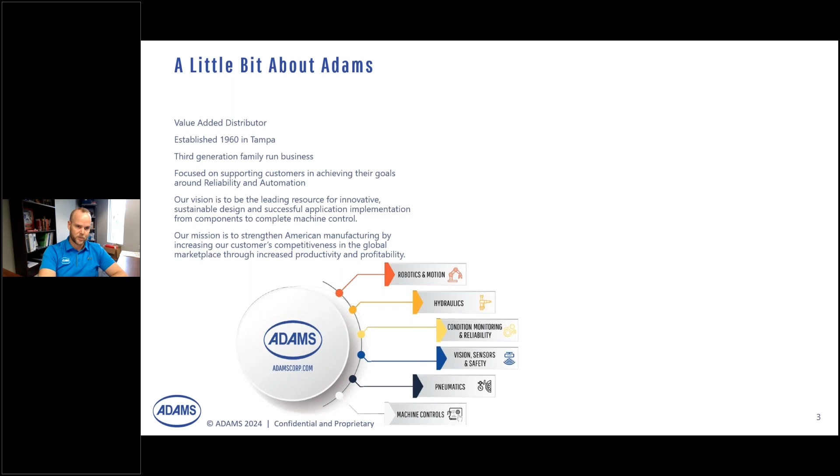A little bit about Adams to start us out. We're a value-added distributor established here in 1960 in Tampa, Florida, on the third generation of the family running this business, focused on supporting customers and achieving their goals around reliability and automation.

A little bit about myself. Background is electrical engineering. I've been in the industry for 13 years, starting with Adams as a technical sales rep based in Jacksonville back in 2011. I've been specifically working with dust collection for the last 9 years. Sometimes I even get my hands dirty, as you see here.

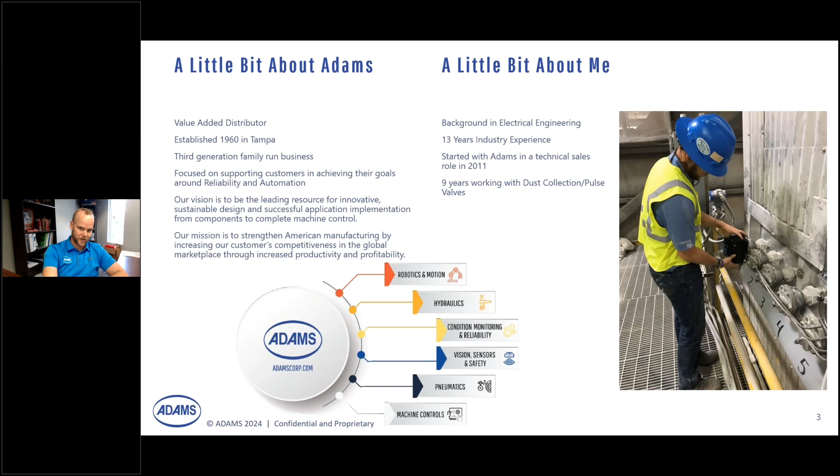So my goal for this webinar is to allow us to discuss dust collection, its operation and typical operation inefficiencies from what we've seen, the energy demand of these systems, and where and why we've found success with these systems.

So the conversation around sustainability is kind of where I wanted to start. Sustainability is a big initiative from a lot of our customers and a lot of industries we see. The main reason I wanted to talk about this is because one of the key pillars of sustainability is its environmental and economic impact. And that impact is driven based on energy demand. So how can we work with customers to reduce that energy and provide them a lot more efficiency around their energy consumption?

As I mentioned, big push from a lot of our customers. So I wanted to highlight some of the customers that we work with, big names that you might know across vast different industries, but each of them focusing on initiatives to reduce energy consumption, to be more energy efficient, and to find ways to use technology that allow them to improve those energy consumptions.

Beyond those industries that you saw, I wanted to highlight a little bit of the other industries that we might deal with. As you can see, it's pretty vast in the industries that we work with. We see dust collectors throughout many manufacturing processes, many manufacturing plants, and there's not many industries that aren't utilizing them to some extent.

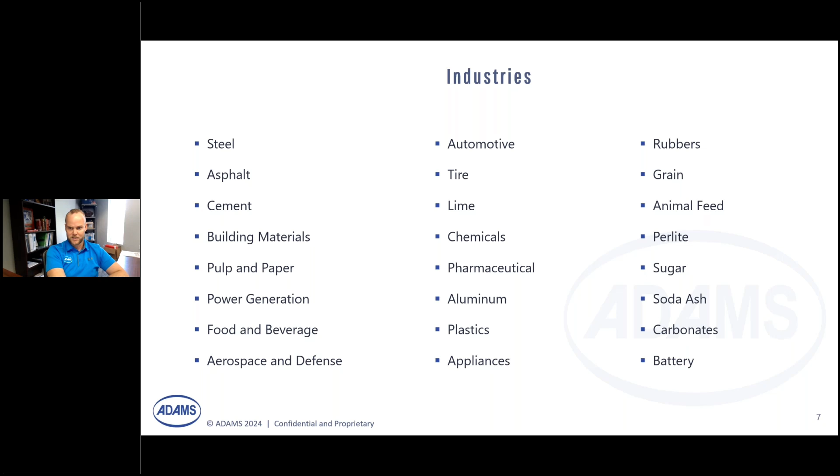So why dust collection? Typically we're seeing these in 3 different categories. This is around controlling emissions as driven by the EPA. This is around indoor air quality, as you might see driven from OSHA's standpoint, or in the manufacturing process of the product that customer might be manufacturing. Think about a cement plant and a raw mill being used in that process of the manufacturing.

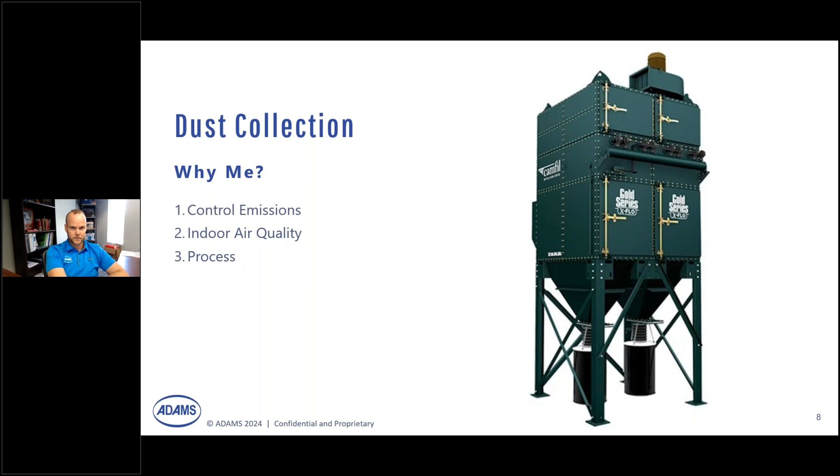There's 4 different types of dust collectors that we typically see in the industry. The main one that we focus on, and the main one that I'll be discussing today, is pulse jet baghouses. So I wanted to start with a little bit of the operations on how these are used.

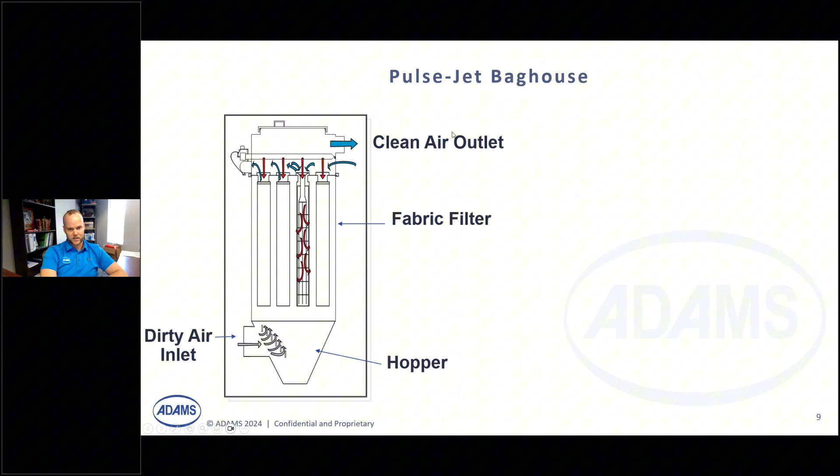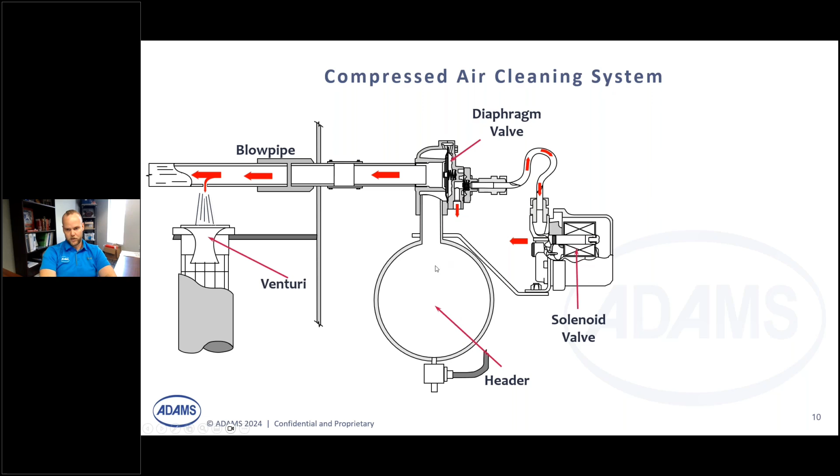So I wanted to dive in a little bit deeper, specifically around the cleaning system of these pulse jet collectors. Typically what you're seeing in these systems is you have a header where the volume of air is being held. That header is leading to a diaphragm valve and leading into a blowpipe. That diaphragm valve is triggered by a remote bleed solenoid valve. Upon the air flowing through the blowpipe, you're going into a venturi that is then cleaning the filter.

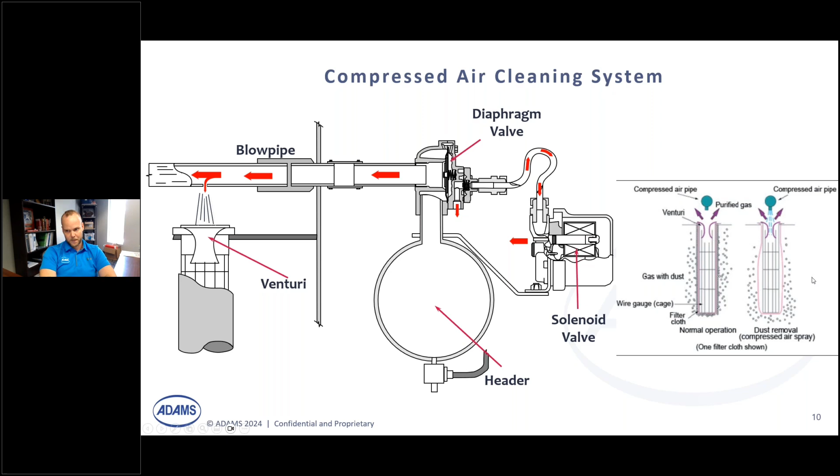The technology used, and that has been used for many years in this operation of these pulse jet collectors, is a diaphragm valve technology. Unfortunately, with that technology, there's inefficiencies that degrade over time and that cause the operation of these systems to not be as effective as they should be.

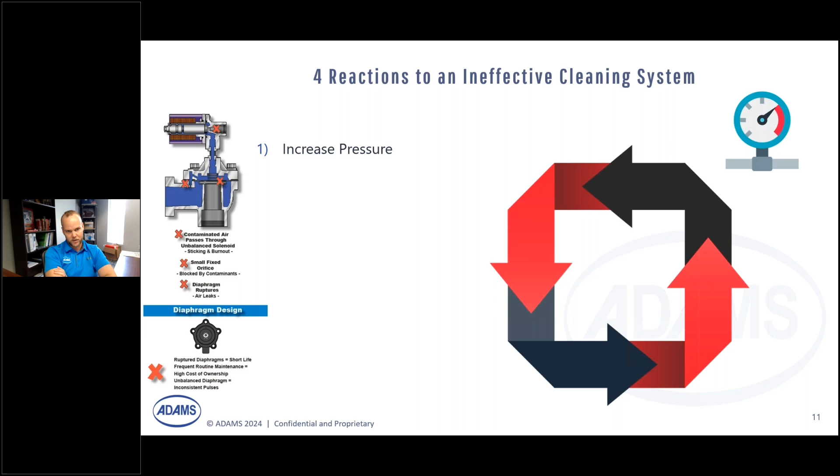When working with customers, we see that typically to overcome these deficiencies, what they do is follow 4 reactions of these systems. They'll typically start by increasing the pressure operating on these systems, feeling that the higher pressure will allow us to be able to clean the filters better. When that doesn't necessarily solve the problems, they'll then follow up by increasing the pulse frequency, that is how often these valves are fired, to get them to pulse the filters more frequently to try to clean the dust off of those filters.

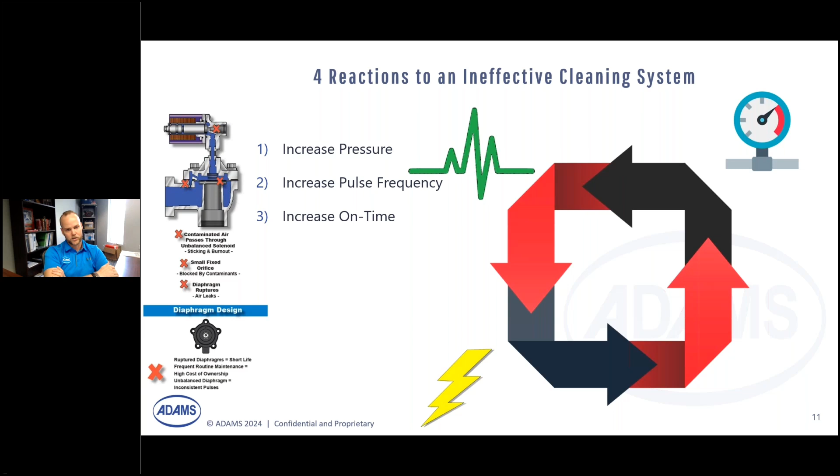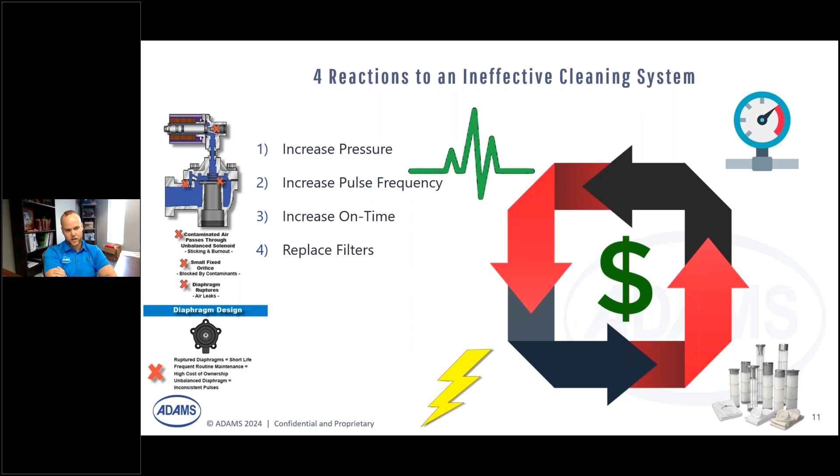Next step they'll do is increase the on time. The on time is how long that solenoid is engaged and how long that valve is held open. Following these processes, if they're still not able to control the differential pressure and get the systems to operate effectively, they'll end up replacing the filters. All of this creates significant operating cost, all revolved around valve technology that's just not being used properly to allow these systems to operate as well as they should.

So how are we different? The valve technology we use is a spool valve technology versus a diaphragm technology. That spool valve is also operated by a 4-way pilot, allowing us to shift the spool back and forth via air. With this, we're able to see multiple advantages in the operation of the systems, but where we're focusing today is around energy savings and filter bag life.

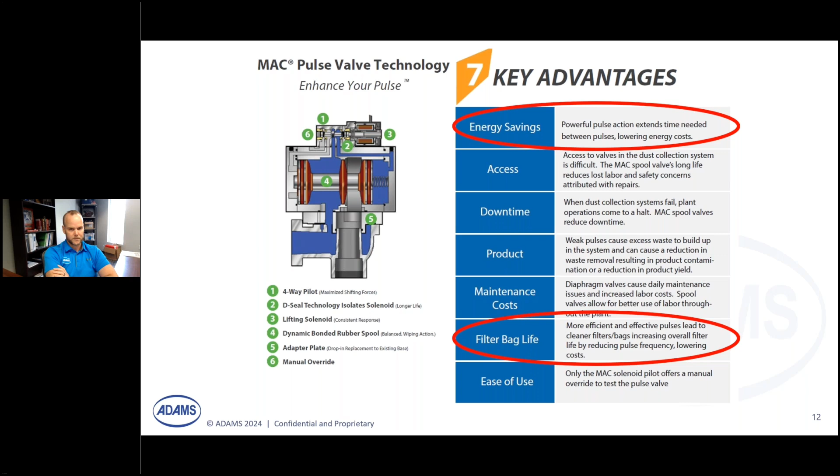How we're able to achieve this is really around pulse efficiency. I wanted to use this scope to give an example of how we're operating these systems much better, simply by changing the valve technology. As you can see, we're engaged electrically for the same amount of time, and operating with the same system pressure, but we're able to achieve a higher impact force because our pressure drop over the valve is significantly less than the existing diaphragm technology. With our spool design utilizing air and a heavy spring to close it, we're able to close that valve in a much sharper time frame, creating a much sharper whip effect and cleaning pulse on those filters. What that looks like in operation, you can see here in this video.

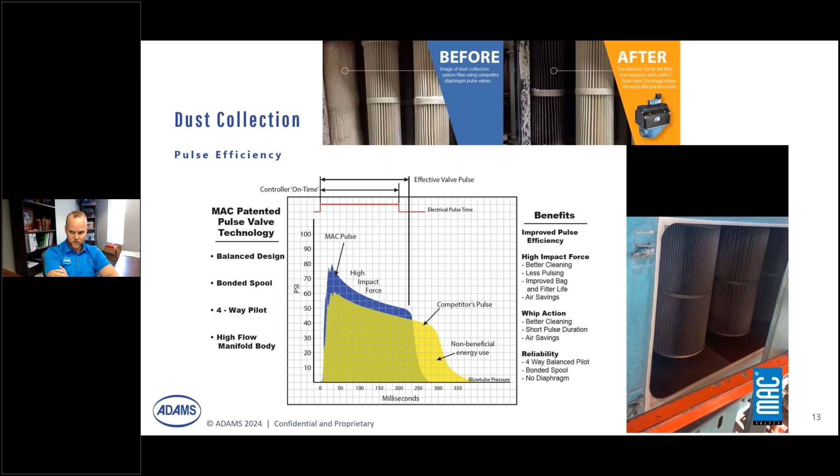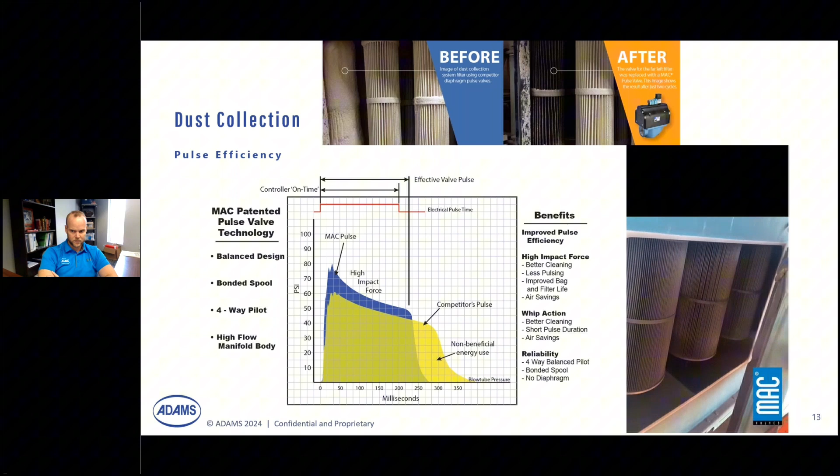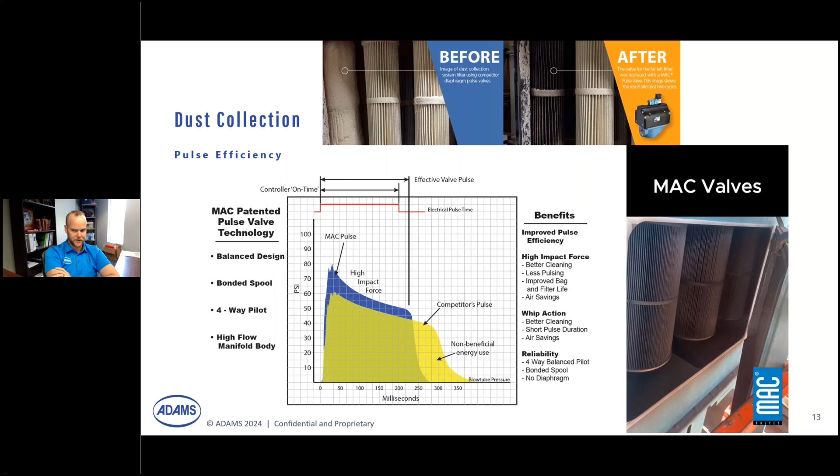I'll play this video one more time. As you can see, there's a standard diaphragm valve operating this row of filters, and the second row is being operated by a MAC pulse valve. You can see significantly more dust is being pulsed off of that filter, dropped down to the bottom of the hopper to be collected, allowing the differential pressure of those filters to be significantly less, so it has to fire off less often.

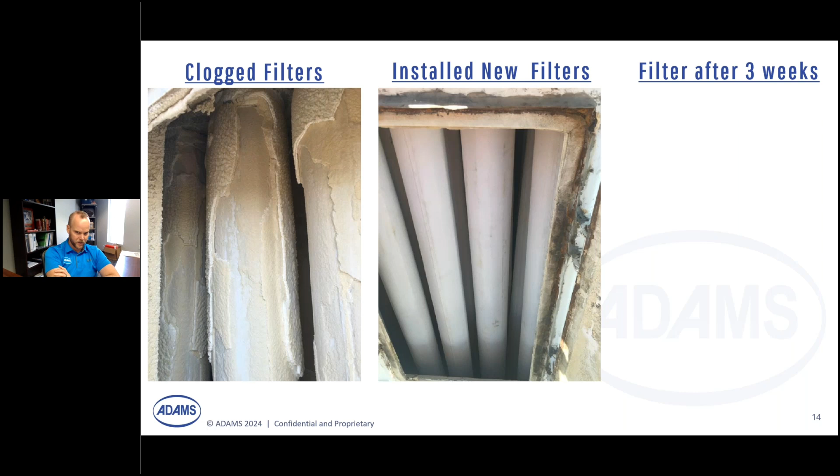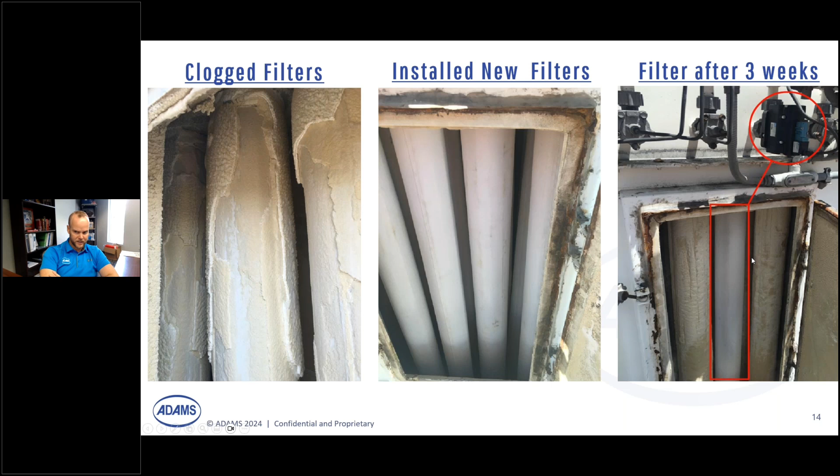Here's another visual representation that I felt was pretty impactful to show. This is a customer's clogged filters on their dust collector. The customer installed new filters and did nothing but put a MAC pulse valve on one of the channels, leaving the diaphragm valves on the separate channels. After 3 weeks, you can see that just the one channel with the MAC pulse valve is significantly cleaner than those channels where it's operating the Goyen valve, or diaphragm valve, still.

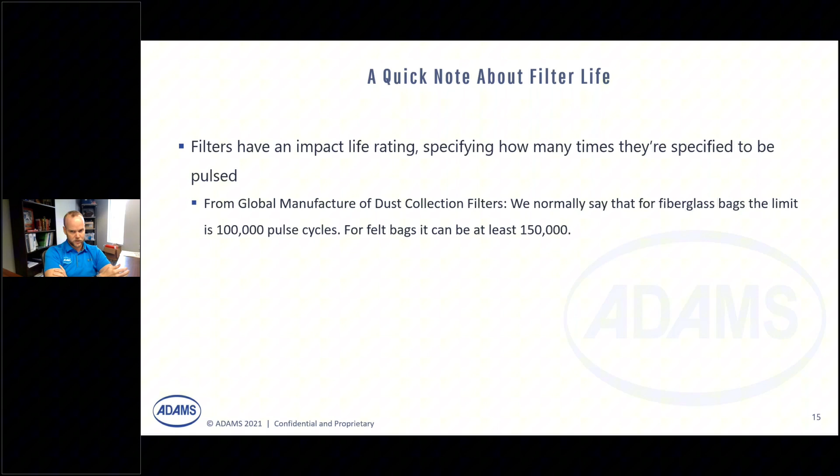One thing to note about filter life: these filters have an impact life rating specifying how often they're able to be pulsed. We're typically seeing this could be anywhere from 100,000 to 150,000 cycles. If we're able to clean the filter per pulse more efficiently, we can theoretically extend the filter life because we don't have to pulse them as frequently, which results in us being able to accomplish some sustainability goals by reducing the number of filters heading to landfills.

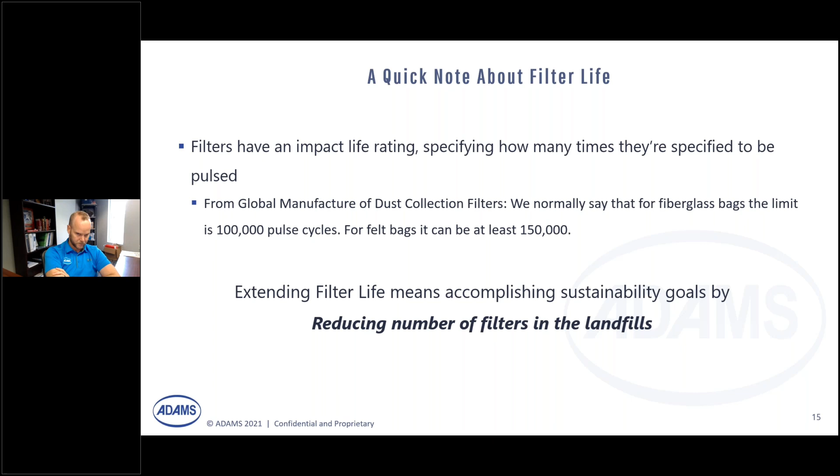So from filter life, I want to talk about energy. I really wanted to talk about filter life savings and the energy impact of these systems. The first place I wanted to start was a significant case study we worked on with one of our customers, who were actually awarded the Best of the Betters for the Better Buildings in the Department of Energy. In this application, they were able to identify compressed air as one of the least efficient utilities in industrial plants, and then see that their dust collectors were the main consumers of this compressed air.

And that's what we see in multiple industries. So what they wanted to do is drive an initiative on how they could reduce the air used in those dust collectors to improve performance, improve efficiency, and reduce the environmental impact. Working with our team and the customer, implementing the MAC pulse valve technology and allowing them to better optimize their system, this plant, as an example, was able to reduce the operating pressure from 100 psi to 85 psi, allowing them to shut down a compressor.

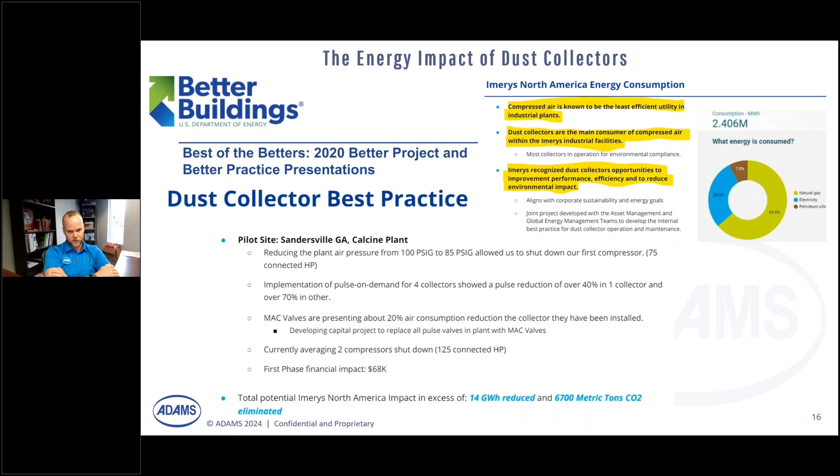Rolling this out across multiple collectors, they were able to reduce air consumption around 20% throughout the facility, shutting down additional compressors and providing a financial impact of $68,000 in savings. This is something that drove them to make an initiative to upgrade their pulse valves throughout all of their plants globally to the MAC spool valve technology.

And I just wanted to highlight another article around this same implementation from Compressed Air Best Practices as well.

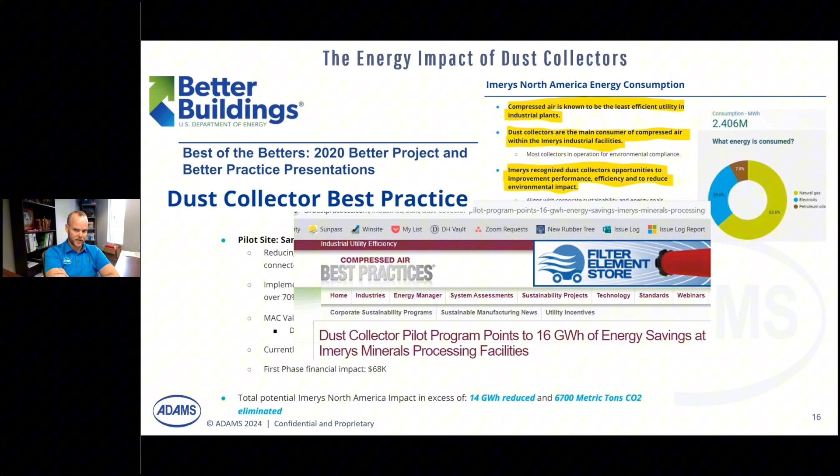Sticking with the philosophy of third-party comparisons, just to be able to show some data. I'm very much a data person, so I want to be able to provide this as much as possible.

Compressor Energy Services, a company out of the Northeast, worked with one of our customers evaluating the flow consumed on a single dust collector that operated with 30 valves. In their evaluation, they found this collector was using an average airflow of 42 CFM, equating to about $7,000 of operating costs just dedicated to the air consumed in that collector.

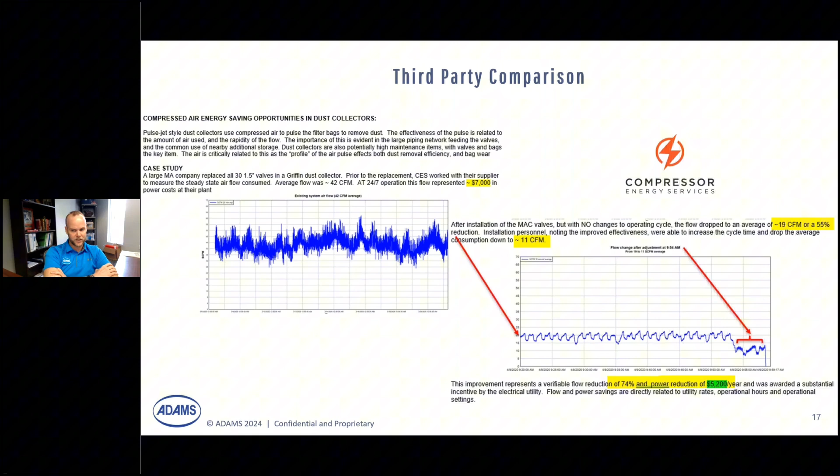Doing nothing but changing the valves on that collector, they reduced the air consumption by about 55%. Following up, changing the operating settings due to the valve upgrade and what it was enabling, we saw them drop air consumption down another 8 CFM to 11 CFM. This allowed the customer to reduce flow in that system around 74%, reducing operating costs from $7,000 down below $1,800 — saving $5,200 out of the operating cost of just the air in that system.

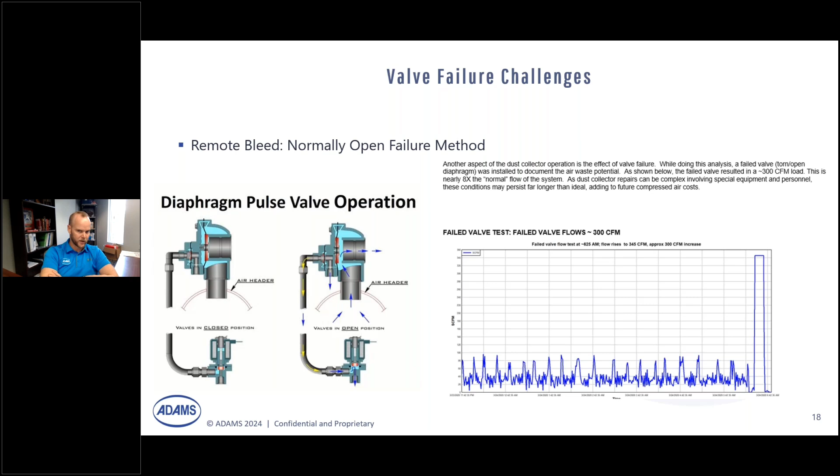Whereas the spool valve technology is designed to fail closed. So if the valve ever were to fail, it fails in a closed state, not driving air through that header or through that valve, allowing the other valves and channels to operate as effectively as they need to.

I wanted to highlight our process. Our process is to visit with customers to survey existing collectors. We work with these customers to identify the valves utilized in these systems, identify the existing settings and operational data — gathering information about how the system currently operates, what the differential pressure settings are, what the on-time and off-time are, how long the filters are lasting, and gathering all of that data.

From there, we take that data back and put together a proposal for our customers, presenting what the upgrade would look like, the anticipated cost savings, and total operating cost of these systems after implementation of the spool valve, MAC valve technology. This allows us to show customers what their ROI would look like based on this investment.

Following the order of these systems, our team works with customers training them on how to properly install these valves, because it's important to put these in properly and utilize the expertise we have learned through this process to make sure these valves are operating as efficiently as possible.

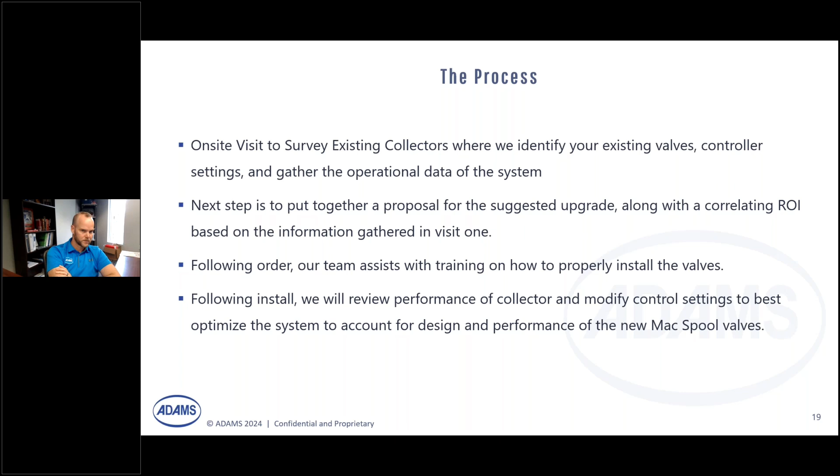Following that process discussion, I wanted to talk through some different examples of where we've been able to implement this with success, to show customers how they can see the impact in their systems.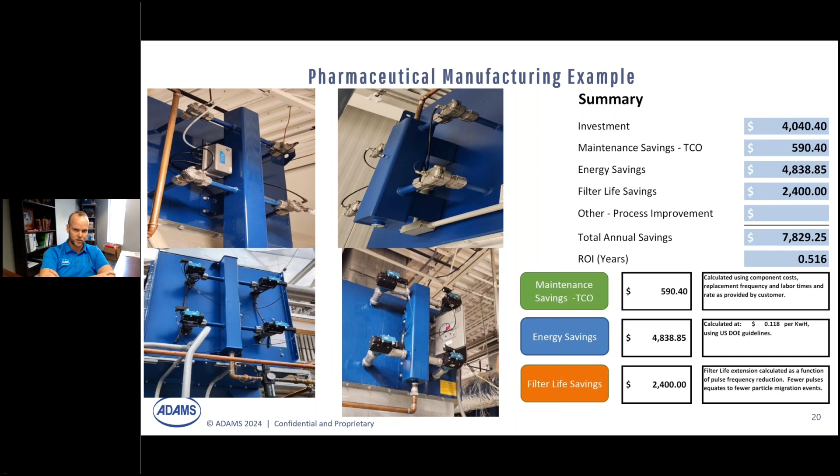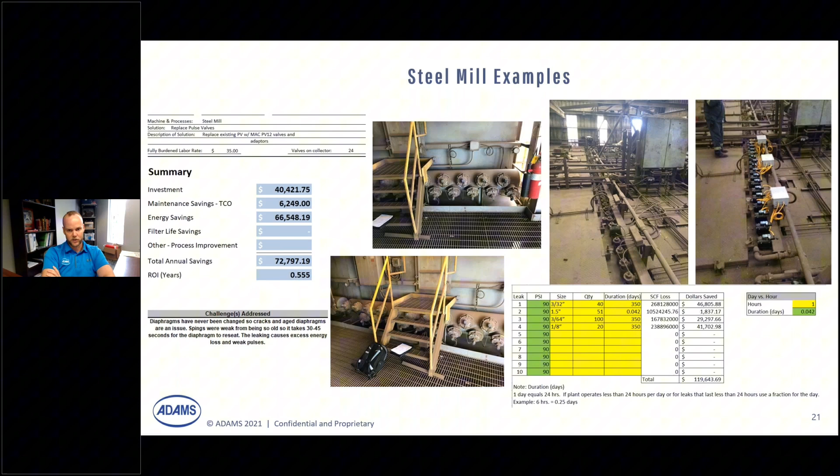That's not cleaning the filter, it's just dragging that out. What we're able to do just by implementing the MAC valves is to allow that closing to be in the milliseconds range as it should be, because you're able to use our valve technology and the air from the four-way pilot to shift this back and forth effectively to provide that sharp pulse, to fire less often, to clean these filters and extend the time in between these filters being pulsed.

Another powerful example here. This was a customer in the gypsum industry that implemented our valves on one dust collector that was mirrored from another collector just right in front of it. This example shows an existing diaphragm valve technology collector versus our valve collector, showing these systems operate exactly the same. The only thing different was the valves being changed. You can see the header pressure, the pipe diameter, the flow coefficient, everything's uniform.

What it comes down to is the consumption, how often is it cycling. You see 700 for the existing diaphragms, 250 for the MAC valves. Same amount of pulse valves throughout, 54 on each collector, and then the consumption in cubic feet per hour. Operational hours are the same, and the consumption per year. So you look at just the operating cost of these two collectors, one being around 27,000, and then after the upgrade for the MAC valves, the other being under 5,000. A significant amount of savings with this being just two of the dust collectors in their full plant.

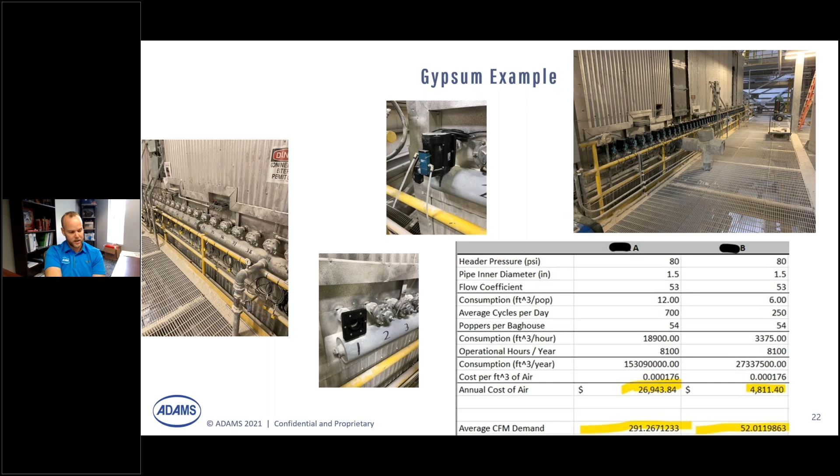Another example in a paper mill where we were able to work with a customer to upgrade these pulse valves on their powerhouse. This was highlighting energy savings, filter life, and operational costs in regards to having to change these valves that you would have to get a lift to be able to get to. So there's multiple levels of this improvement, but realistically looking at the two things regarding sustainability, our energy savings and our filter life extension, just those two equate to over $4,000 in savings for a small collector here that only had 10 valves.

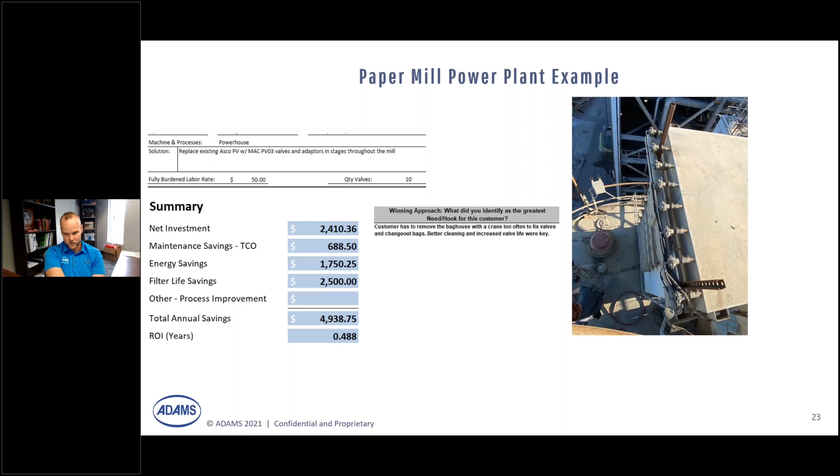Talking through our process, what I wanted to emphasize is us coming back out and working with customers to make sure these systems are operating and the settings are how they should be. There's a customer that had made an upgrade to the MAC pulse valves, and a couple weeks into its operation, we wanted to come through and make sure the system was operating as it should, the settings were optimal. What we found is that the settings hadn't been adjusted from the previous diaphragm valves.

That equated to the valves being operated at 400 milliseconds on time and being pulsed 9 times per minute. Through optimizing that system, through monitoring the differential pressure, and through changing the on time to what it should be, we brought that on time to 140 milliseconds and dropped the pulses per minute to 3. Just those settings on that one 9-valve collector was able to provide the customer $24,000 in annual savings.

So there's multiple examples here, and this is just a few that I wanted to show you. But realistically, the amount of cost you can save from an energy consumption standpoint to achieve those sustainability goals, to reducing energy consumption and to make the energy you're using operate more efficiently, that's really something we're able to achieve with customers on a regular basis. We wanted to make sure this was known throughout, and that's the reason why we wanted to have this webinar.

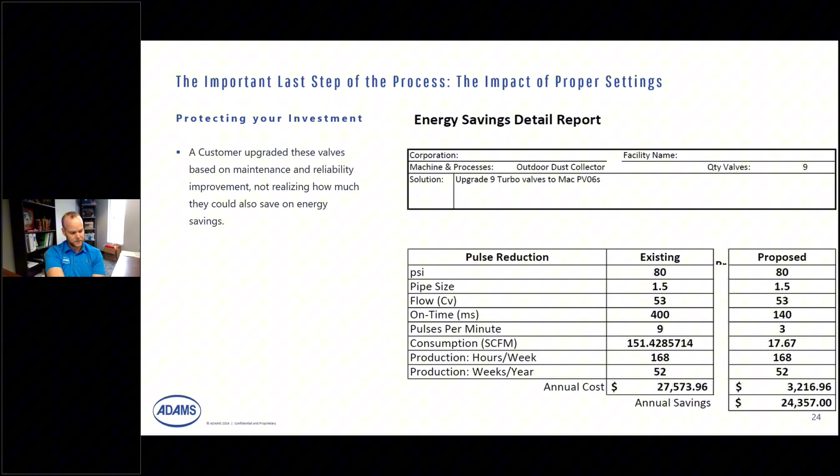So that's where I'll finish, a quick run through of that information. Love to have any questions that customers might have on this call. Right now I don't see any questions just yet. If you have a question, raise your hand or put it into the chat.